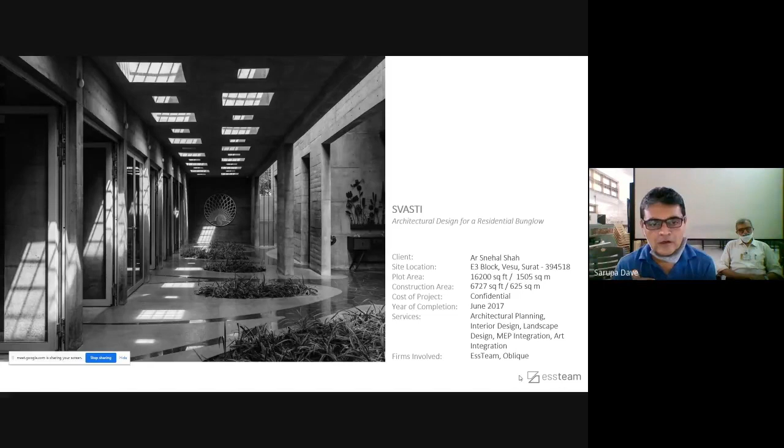So another clarification I want to make at this point of time. What you're going to see today, the drawings, etc., are done by professionals. It's done after 15, 17 years of experience in the field. So please don't get me wrong. We don't expect this out of you, but the idea is to understand the process. With time, with experience, you would obviously learn how to get things right. But the approach is something I want your antenna to absorb, to catch.

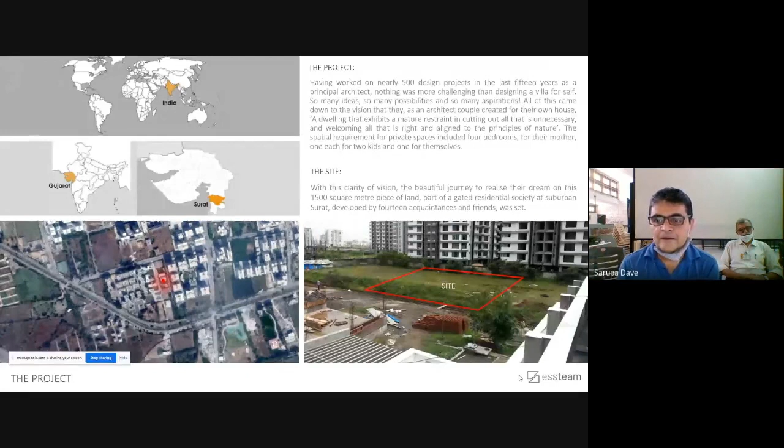Okay? So this picture was taken 4 years back. It used to be a ground like this, and this is fascinating what our profession allows us to do. We really convert open ground into beautiful spaces. So the plot size is about 1500 square meters.

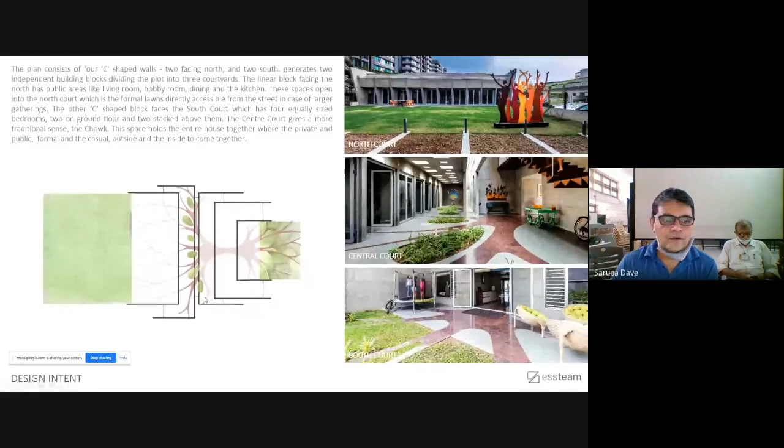So this is what we do in college. Till now, in the fourth semester, we always talk about the concept, right? So this house, I'm sorry I didn't show the north, but north is to your left, and this is south. So the whole project is made up of one, two Cs facing north, and one, two, and three Cs facing the south. Okay? So this is the basic idea behind this, and this is where you enter.

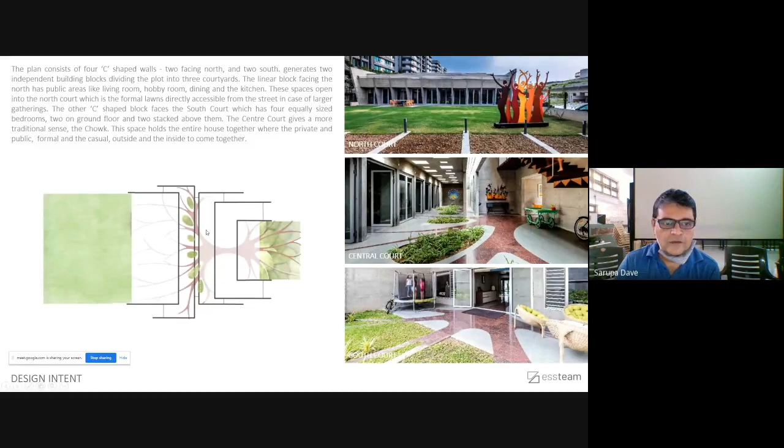So there is a central court, there is a north court, and then there is a south court. So when we converted it into the architectural plan, it started looking like this. Wherein we can see the C like this, the C like this. This becomes the public block. Public block has basically the formal living, multi-purpose, dining, and kitchen. They all open up like this into the north court.

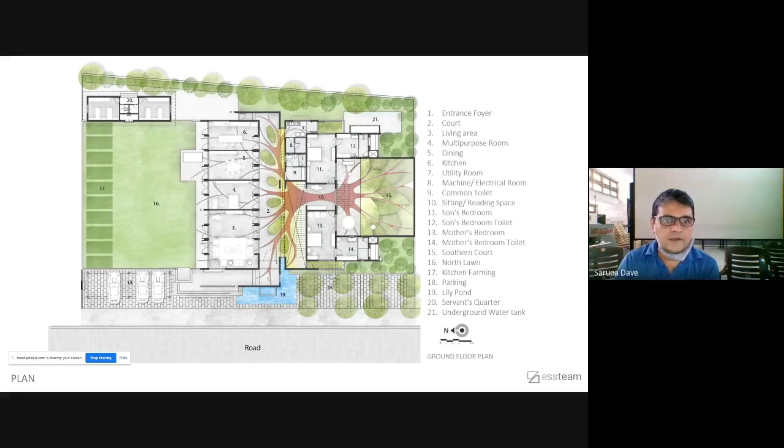Similarly, on the other side, the second block is basically a private block. So you can bring like this into the central court, and you go like this, and this is the bedroom. This is the bedroom, and it has the services, the bathrooms, and the dressing areas. And number 15, which you see, is the south court. It's a very simple plan, no jazzy plan, very basic functional plan, trying to respond to the directions.

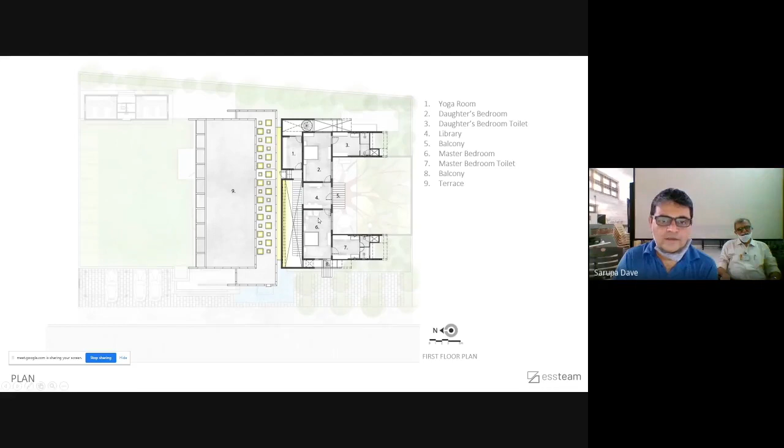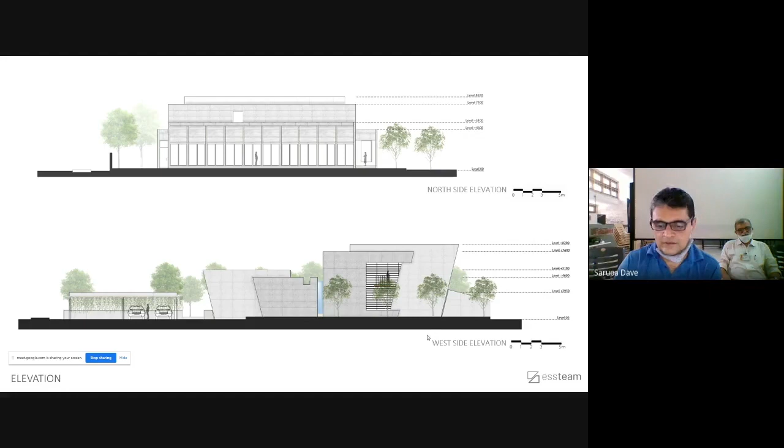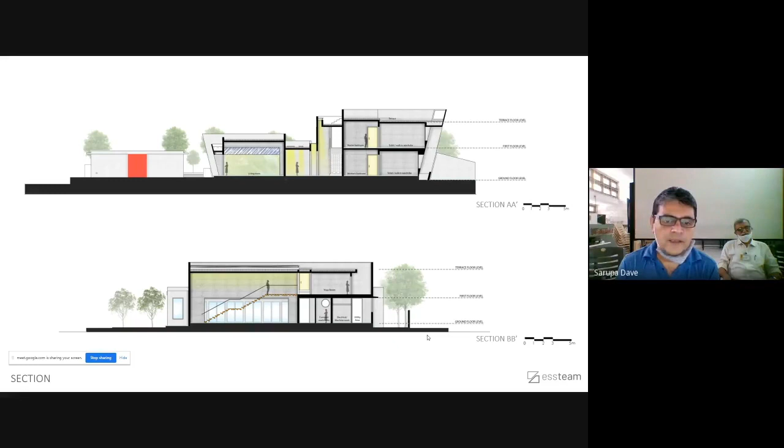Here are the sections. We'll talk to you more about these. But these were done at the architectural stage of design, just like in the semester. Let us say this is the final jury presentation. You can look at it that way. So these are the final plans from which we derived sections. And suddenly I jump over to the final product. It looks like this. Just like the plan, it's a very simple building. And you can see there's a clear-cut gap between the two buildings, and there's a glass slit aluminum skylight through that.

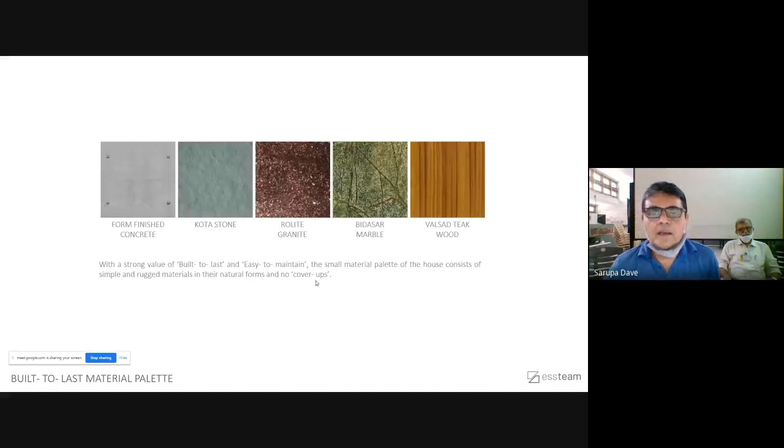The next step, whenever you try to start imagining now that the concept design is done and you want to start building, you start thinking about the materials that you're going to use. So we kind of agreed to a value system that whatever we do needs to last long. So built to last was an important value, and easy to maintain was another important value, because when you make slightly bigger houses, it's so difficult to maintain, it's very difficult to find people to do it. And so when things go wrong, you don't want all the agencies again and again in the house.

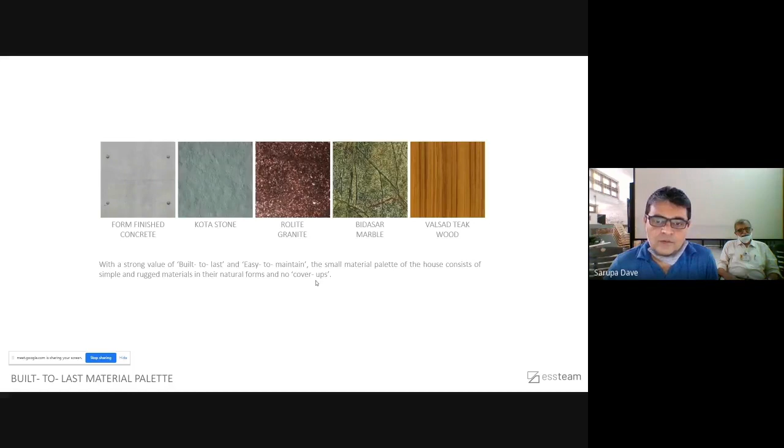Also, we were conscious that we did not want the materials to travel a lot, so we took materials which were available within about 200 kilometers from my house. It is a very important part. So whenever you start working, you have to finalize your material palette. Some of you might have even done so at the concept stage.

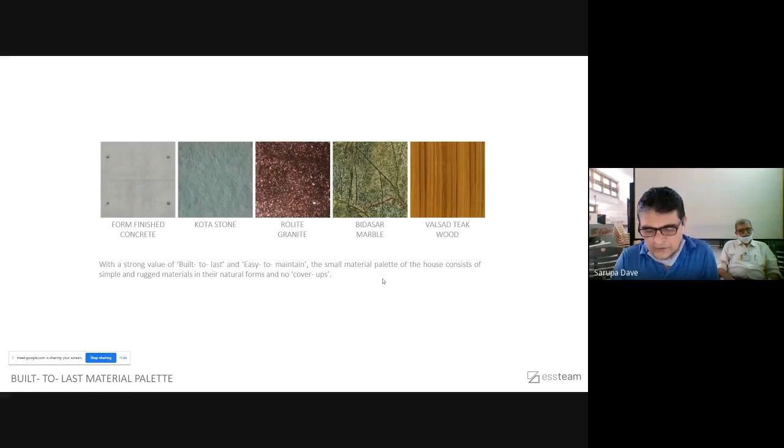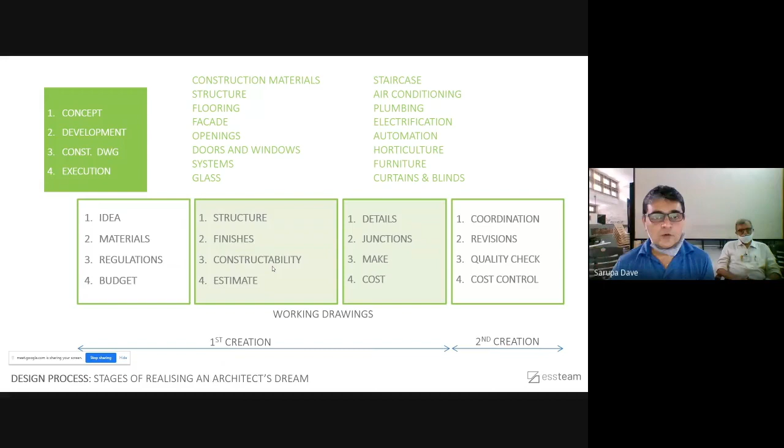Next is the opening system. What kind of openings you want, what kind of weather shades you want, those kinds of things will come into place. For doors and windows, you have seen the unbelievable options available now for creating doors and windows in terms of materials, in terms of strength, in terms of security features. So this is where your knowledge about these things will come into play.

Then systems. Systems is again more related to things like windows, how you want to open, whether you want a slider, whether you want an openable system, whether you want doors, how all these integrate with your project. So many systems we use in a project, and the knowledge again comes into the picture. What kind of glass you want to use, how do you want to actually visualize your staircase. In fact, a staircase has a lot of technical aspects to be understood.

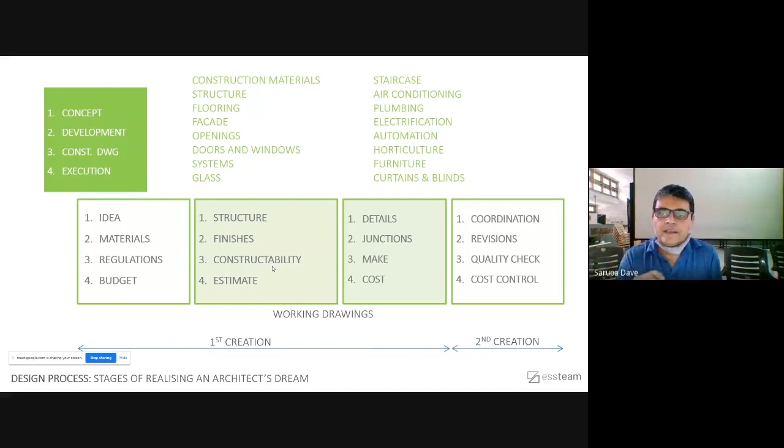Once I fell from a staircase while I was climbing in a project, not designed by us, because the riser height, the vertical height of every step, had a variation of 10 mm. Okay. So with the variation of that 10 mm, I was used to climbing in a certain way, and I missed this 10 mm and I fell down.

So how to get your staircases right so that you're absolutely correct in tread and risers. How do you want to see the soffit? નીચેથી કેવો દેખાવો જોઈએ staircase? ઉપરથી તો બરાબર છે, but while you're climbing, so even that becomes important.

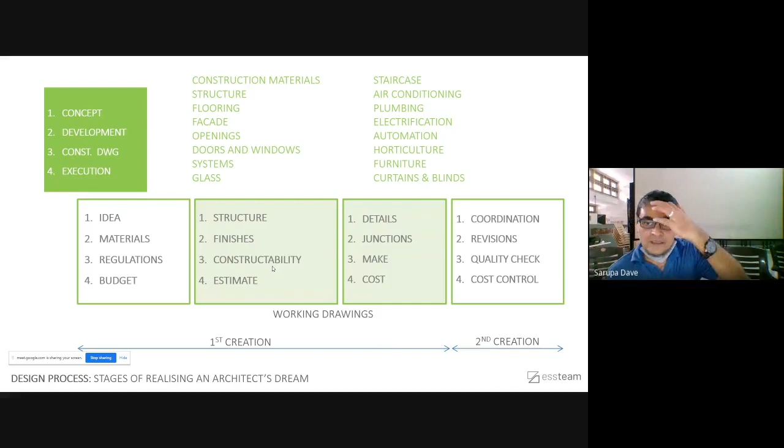Then a lot of services, technology you need to know to integrate in your project, like air conditioning, plumbing, electrification. Lot of innovation happening all the time. For the last few years, automation is something which has really now spiked up. It has become the necessary part of a project. More so after COVID, because now everything is about data. You need data for everything.

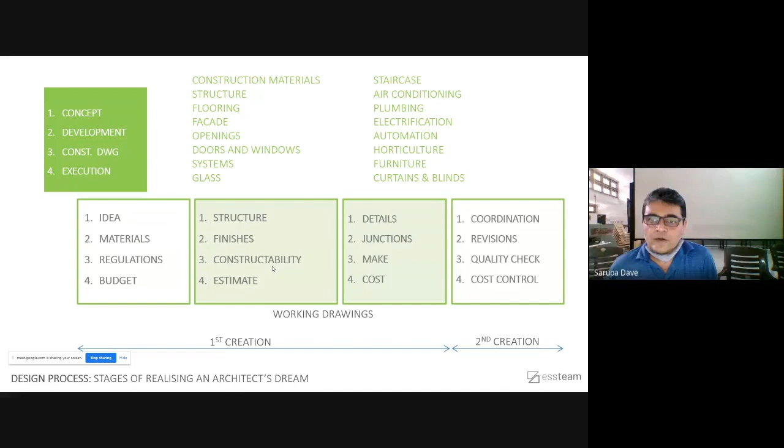Like the Aarogya Setu app, see how government is trying to track things with that. So automation has become very important. So it is not something you have an option to know or not. Better know it if you want to actually build.

Horticulture. Horticulture is the technical aspects of landscape. What plant, કેટલી light જોઈએ, how much water does it need, what would it look like, what kind of leaves would it have, how many months in a year would it have leaves and flowers. So those kind of things are also the design aspects.

And as you go further to the detailing, obviously the furniture parts, all your furnishings, floor, curtains, blinds, all this come into picture. So this is the overall picture that you are getting into as professionals. You are just in your fifth semester.

It's very early days, but it's important to have the paradigm that architecture is not only about concept design. If you cannot detail it out with passion, you are only half the design. With that, I'll move forward. I will ask if there are questions or not, but I think you can post it on the chat box. This is very important understanding to have according to me.

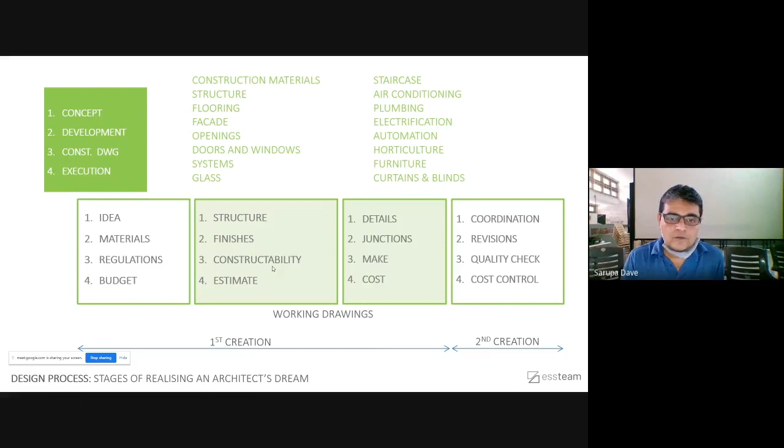So out of these four, in these 4 weeks, what we targeted is to focus on structure, enclosure, utilities, and staircase. This is an incomplete list of what all information and knowledge you need to have, but you have the whole life in front of you if you get your approach right. So I'm going to talk about the same 4 things which you will be learning in the 4 weeks from today. So starting with structure.

Now, once your concept is done, then you start thinking, okay, how will a person live inside? What will be his needs? So in that case, me and Saloni must establish our needs. When it comes to structure, what are our needs? So avoid any kind of offsets of structural members with the wall. Everything is structural in a concrete house.

So, like you see, especially for people who are living in apartments, if you look at the ceiling, you'll see an offset of the beam in the wall. Okay? Because the beam is bigger and the wall is narrow. Ideally, you don't like it, and then to hide it, you do all kind of treatments with plaster of Paris or paneling or something to hide that. So this was our need, which was established right from the beginning.

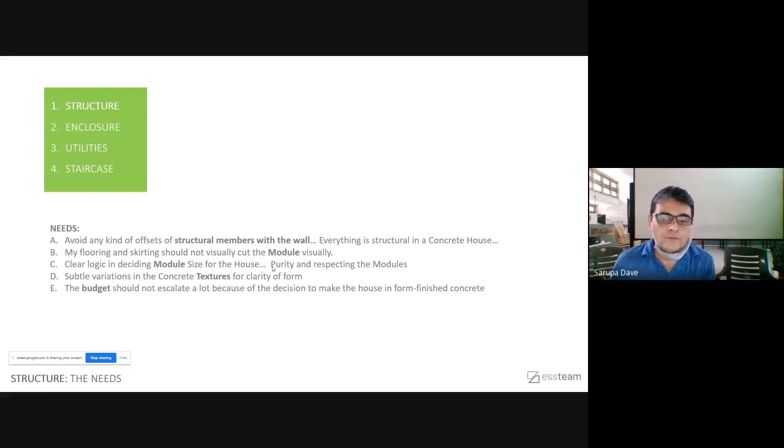Oh, so this is the kind of drawing your project will become when you try to put columns into it. Now, what I want you to see here is the width of the column. I have zoomed up a part of it on the right. I hope you are able to read it. So, what is common is the 200 dimension. So, we have ensured that all the walls are 200 in size, all the beams are 200 in size.

And this wall thickness again has to be a multiple, divisible perfectly by the module size. So this was an important process we did. This was a to and fro process with the structural designer, but we kept our need alive that we wanted only in 200. So I'm just zooming up a part of that.

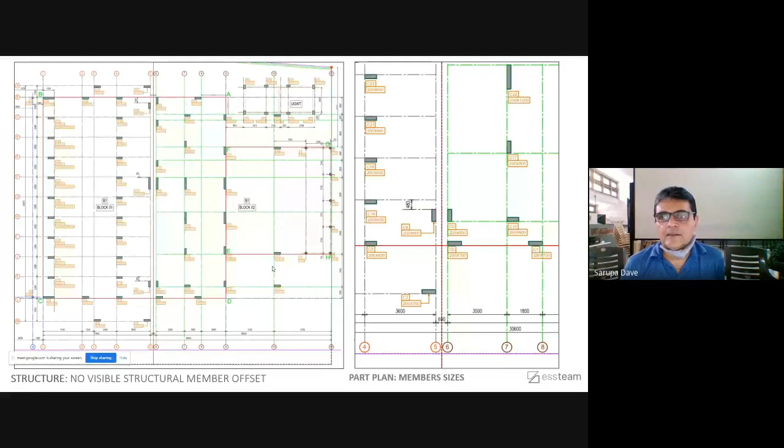If you can see here on the image on the right, you'll see C22 at the top, the column. C22, the size says 200 by 1200. Now try to find the same column here. Okay. So it's the one next to the 19th and the 20th tread in the staircase, C22. So all the columns are marked in the drawing. So though everything is RCC, there is a structural part and then there is a non-structural part. Okay.

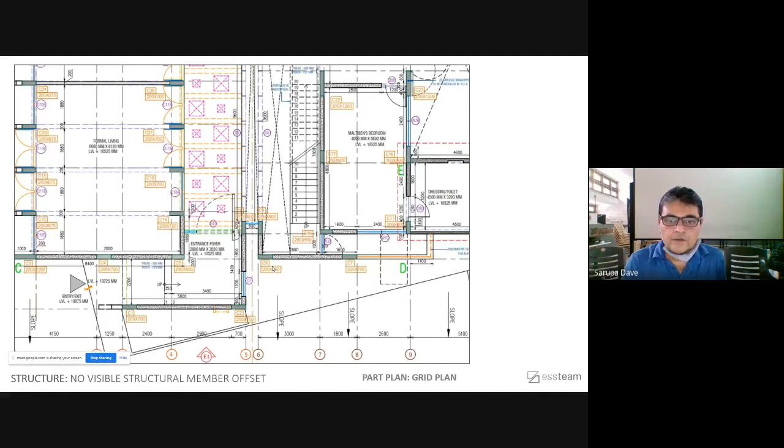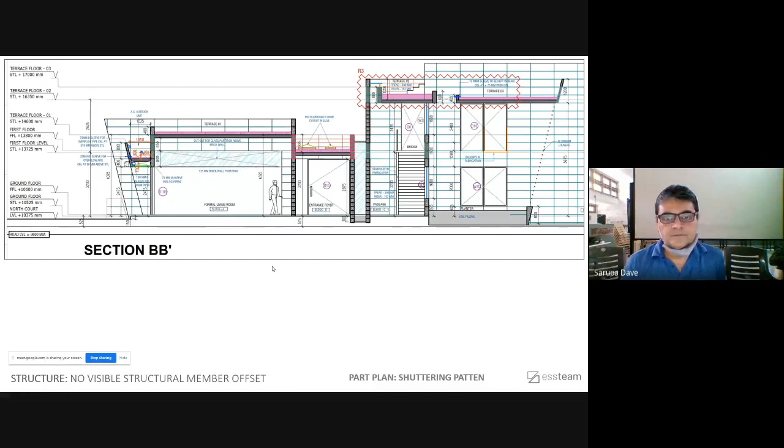So that's what the section looks like. So you can see here, there are no beam offsets. I want you to see that. Everything is clean. You can see the modules. And this is what the space looks like. You can see the 200 grids everywhere. Okay.

This is the north elevation. I would like to talk here about how the modules have been designed. So there are two kinds of modules in the house. You can see there it is written block A. I'm referring to the elevation on the top. The front part in the north says block A, and there is a block C and D in the background. Block C and D, you can read in purple the dimensions. So it is 1200 by 400 grid. Okay, I hope that is very clear.

What is not clear here is what is the grid size of block A. Block A is not in the multiple of 1200. Okay? There's a reason to it. We come to the reason later. But you can see the whole house is following this particular grid. So if my grid is 400 in height, obviously my sill, my lintel, everything follows that. You can see that.

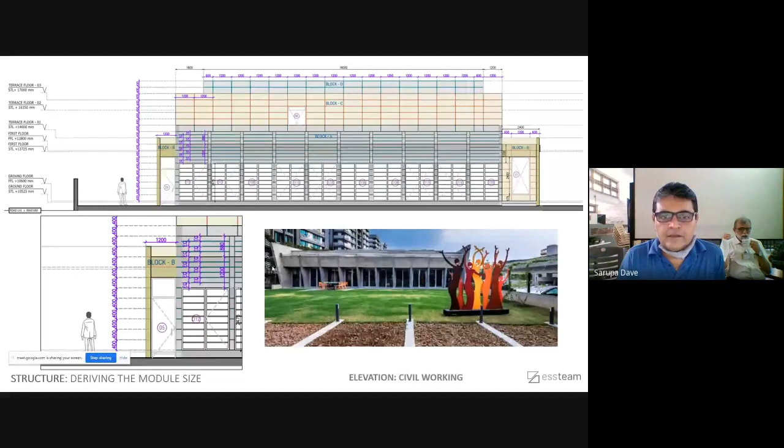So the same area again, I'm zoomed in the same area, and you can see the grid size written in green color. Okay. Try to have a look at the legend at the bottom right corner. So legends are a very important part of any drawing. They are like your alphabets. Without alphabets, you won't be able to read your drawing. So it's very important to understand that.

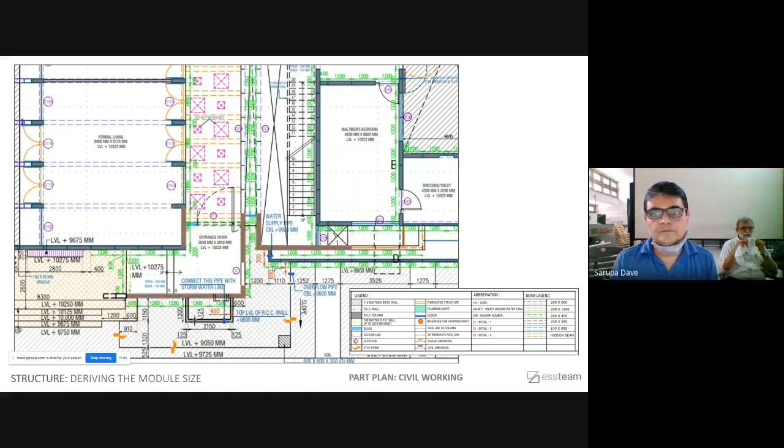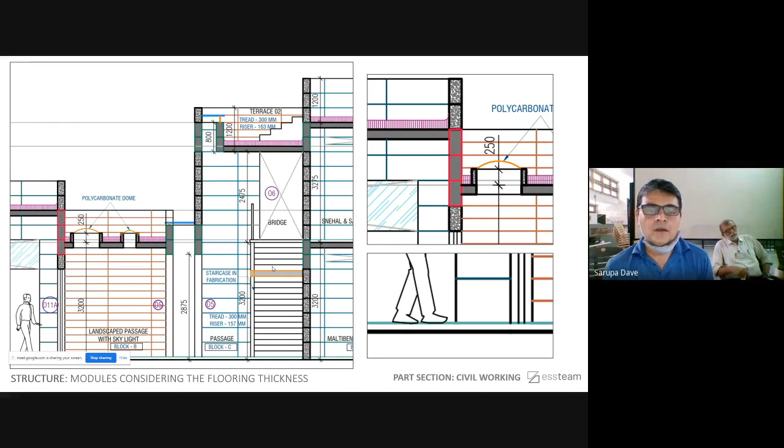Another thing I would like you to notice is that our terraces need waterproofing. So when you do waterproofing, it requires a certain thickness, which is shown here in purple. So even that thickness has to be considered whenever you are making your grid sizes. So these are the two things I wanted to show you in this slide.

So it's pre-decided that these two blocks B and C are going to be in texture, which in our case we have taken imprints of pine wood on the walls, whereas block A, D, and E are in smooth finish in planning. So this is the next need which we had established, which we are trying to satisfy.

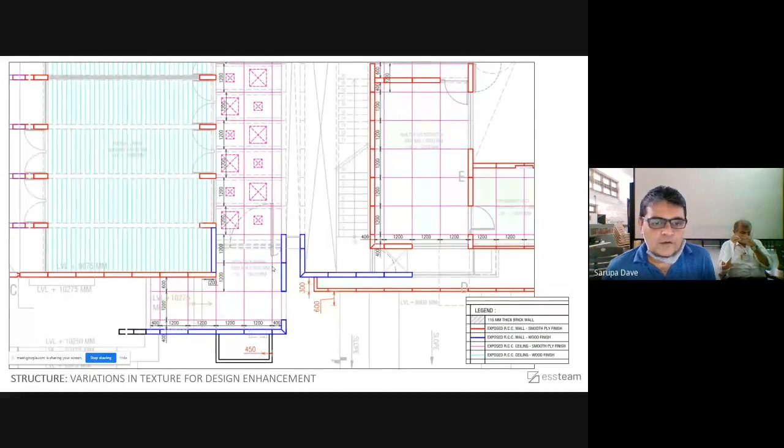Now that obviously needs to be reflected in the plan, otherwise the contractor would not understand. So all that is in red is in smooth ply finish, and all that is in blue is in wooden finish. Okay? So again, there's a legend at the bottom right, which you can look for.

Another thing which you can see here now, which was not there before, is the ceiling patterns. So you don't just need to decide the walls, but you also need to figure out how the pattern of shuttering would look in the ceiling. So the lines in magenta and cyan show the reflected ceiling plan of these respective places.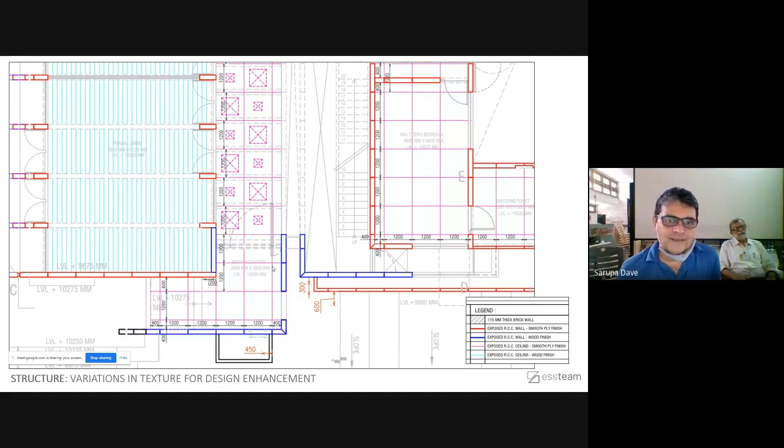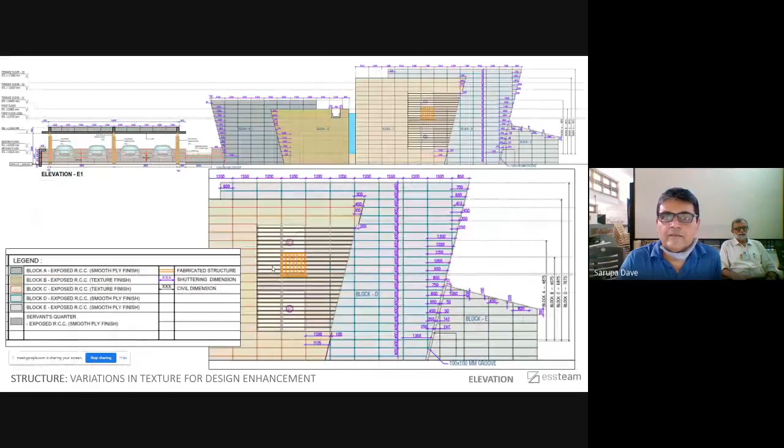So that's what it looks like after it's done. I believe you can see the wooden entrance, the block B and C. It's apparent because they are smaller strips. Wood is not available 400 mm wide. So we've taken multiples of 200 mm to do the texture. So this is the elevation drawn before that, and this is the way it is built.

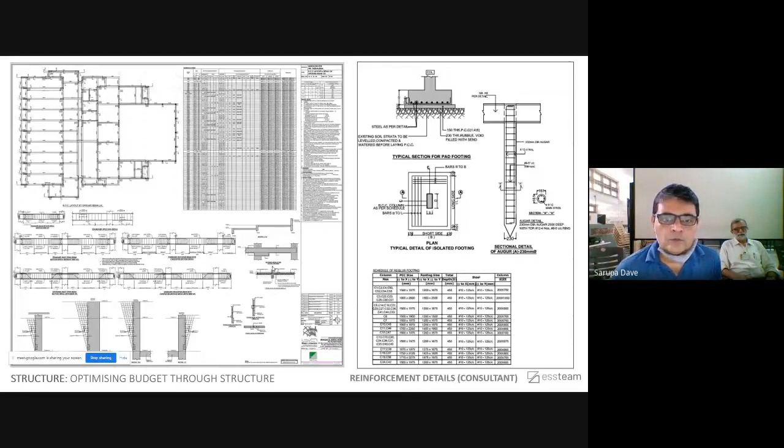Now comes in the structural designer, the consultant. You don't have the luxury as students to deal with the consultant, but these are the kind of drawings we make. We will send and say approve this. So your obvious question is, what is the steel? The reinforcement steel consumption is one of the important determinants of the cost for an RCC structure. Right?

So he told me that the consumption of steel is coming to about 6.5 kg per square feet, which if you convert is approximately 70 kg per square meter. Now that makes it very expensive. 1 kg of steel is about 50 rupees, and for a 7,000 square feet house, for every kg, I'm adding about 3.5 lakh to the house, which I thought, how can I save it?

So we worked back and forth with the structural designers and focused on all the non-structural RCC members to reduce the steel, and we did it very well, and we could bring it down to about 5 kg. So we could save about 1.5 kg of steel, wherein almost 5.5 lakh rupees were saved by this understanding. And your clients will appreciate this if you are able to do it.

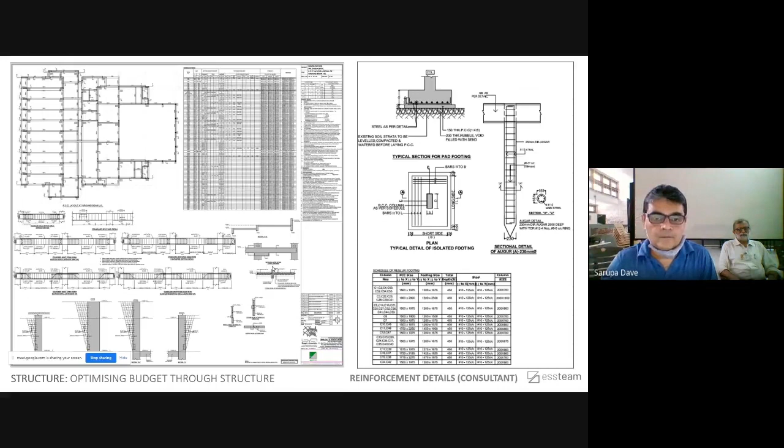So to sum up, what do you do in structure drawing? So why is structure important? The concerns are with the aesthetics. You are worried about what your project will look like. You don't want unnecessary structural members. You also want to consider the safety of the inhabitants. You want to look at economy, and you're also looking at speed. The faster the building is able to be constructed, the better it is for everyone, the user, the designer, the builder.

So what are the tools that you have as designers? Dimensioning systems like modules, etc., is something which is there in your hand. What is the difference between the lintel height of 2.2 meters and 2.5 meters? All those things will depend on your sensibility as a designer. Next is the openings. How to create openings is within your hand. What kind of systems you propose for various products is in your hand, what kind of finishing you want to use. So all these things will be reflected in your drawings. The tools are something which you use to take care of your concern.

Right? And obviously, you need to have some values to make decisions. There are hundreds and thousands of products and solutions available for everything. So if you define your values, then it will act as a filter for your decisions. So for me, cost was a decision, maintenance was a decision. The life of the product was also a very important decision. So there are places where I've spent much more to get a very long life. And obviously, visual appeal, the aesthetic part, which is important as a value.

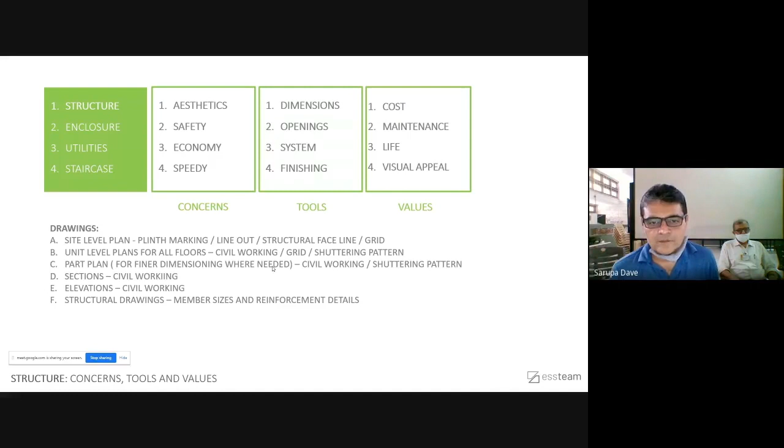So to take care of structure, these are the kind of drawings you will need to make. You need site level plans, plinth marking, line out. I'm sure your teachers, as you go ahead, will be able to show you more of this. Unit level plans for all floors. So there's a different plan for civil working, different plan for grids, shuttering pattern, etc. I tried to show you in parts here. Then there are part plans needed, sections, elevations, and structural drawings. So this kind of takes care of all the structure related issues. So we're done with the structure.